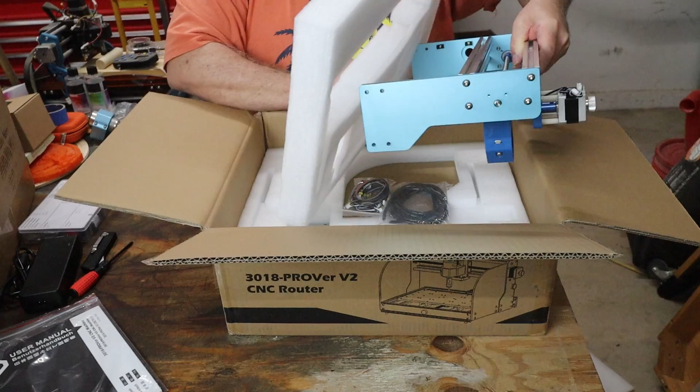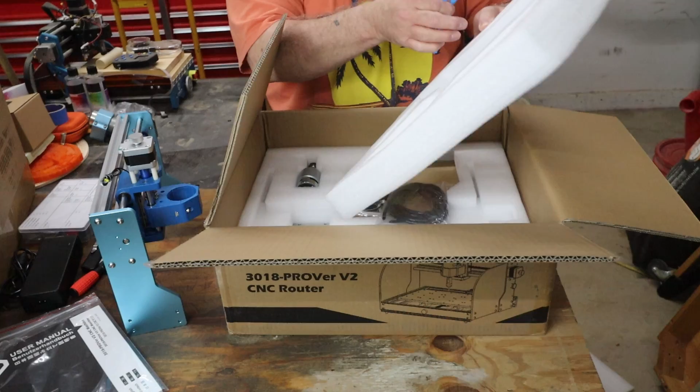Gantry looks nice. Another piece in here, let me get it out. Oh, it looks like plastic trim, I guess, to cover up wires that run along the extrusion.

Air tubing, looks like air tubing. Oh no, that's that plastic - when you have wires, that plastic stuff you wrap around the wires, keep it all together, can't think what it's called. Some more connectors.

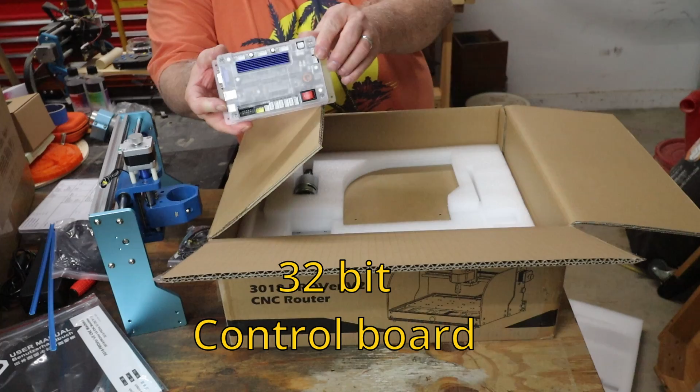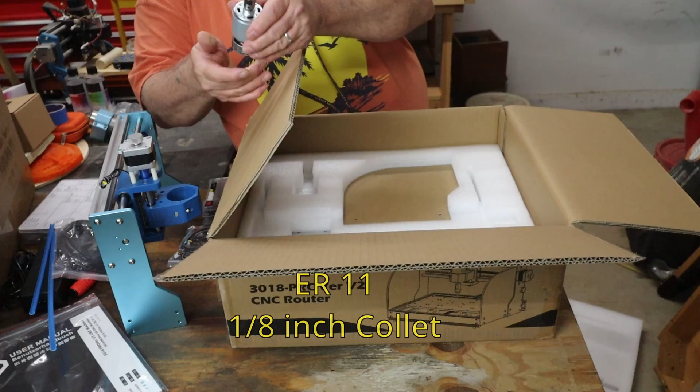Two pieces of acrylic for the sides. It says 3018-PROVer on it. We'll have to peel off the protective covering there.

And always look at your foam on both sides. You never know, you might miss something. Everybody's done it one time or another.

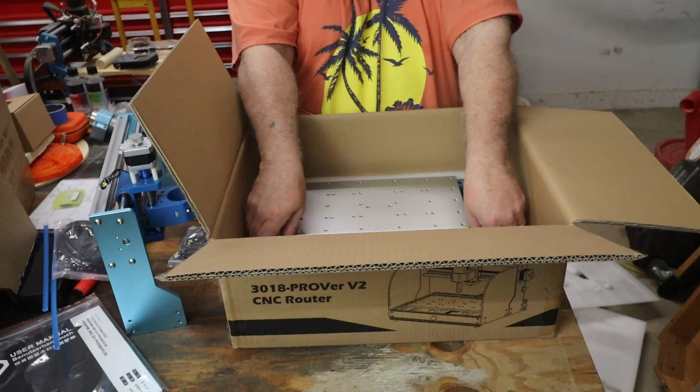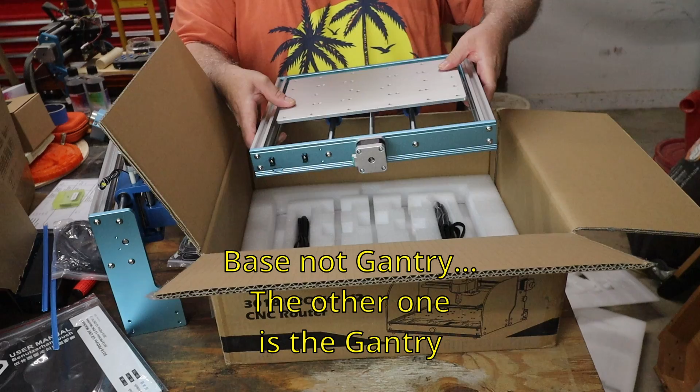Small set of bits. And here's the bottom of the machine, the base. We got the other half of the power cable there. USB, goes to your PC. Another power connector.

And it looks like that's everything in the box. So, take it.

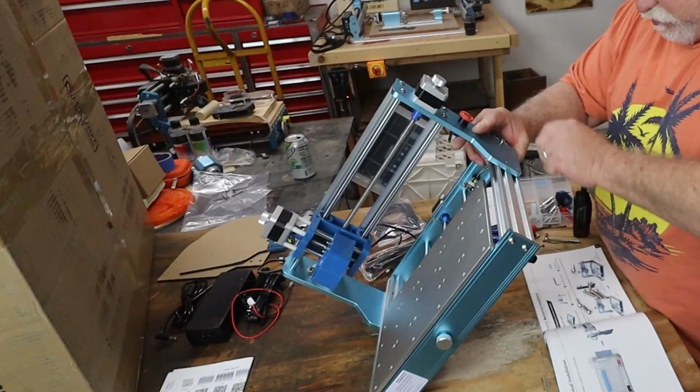Alrighty, I've got it all put together, so let's take a look and see what we got. The limit switches were not pre-installed, and all the wires were not covered in their sheathing, so I had to do that on some of it.

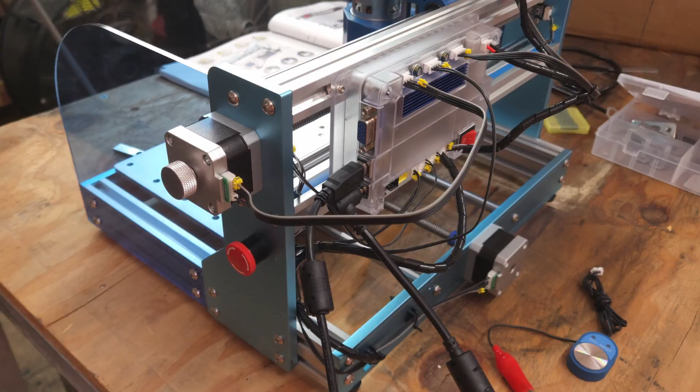This particular type of 3018 does not have an offline controller, so you need to be plugged into your PC. Kind of take a peek at what we got here. And then I got hold downs right here, metal hold downs.

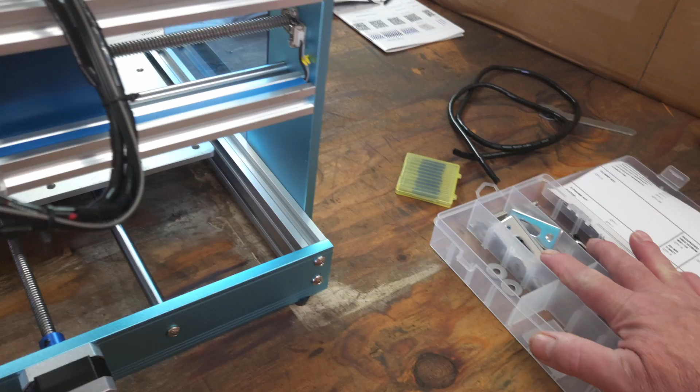I usually do blue tape and super glue. Usually works best for me. Got some sample bits here.

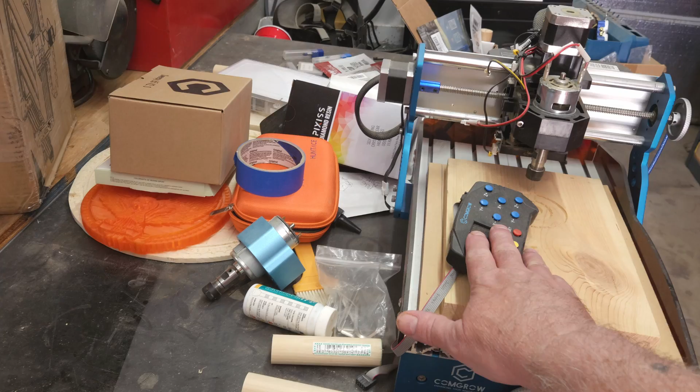Now, offline controller, you can buy them depending on which model you buy. Kind of like this Comgrow here had an offline controller, which I never used. I always tethered to my PC. But we can take a look at what we got.

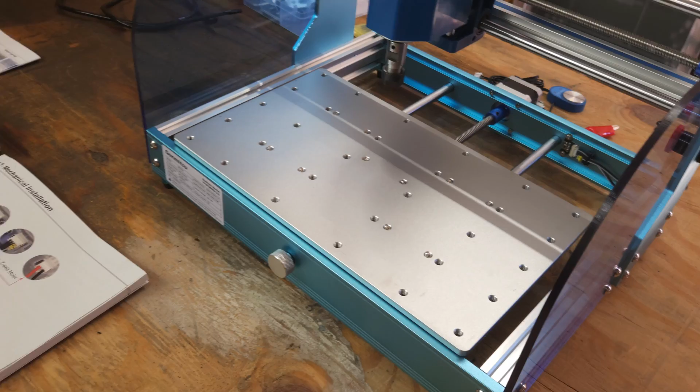And this will be the first 3018 that I've had that the bed moves back and forth, rather than a gantry moving - the gantry is fixed on this one. Goes left to right, and the bed comes forward and back. So that'll be pretty cool to try out.

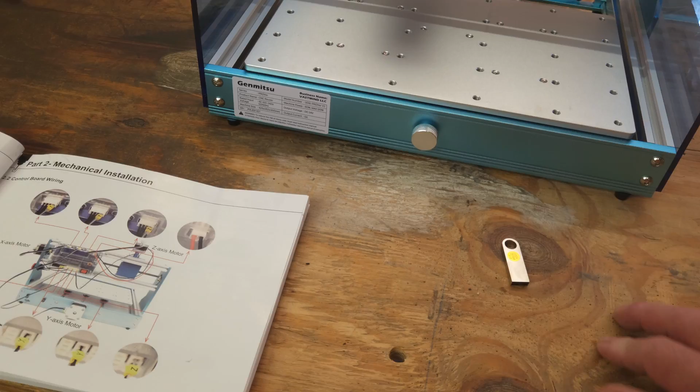So now you need to take the USB stick right here, jump over to your computer. If you've never had a CNC or laser installed before, you'll need to install the serial driver, the CH340, on your computer, and then we'll be good to go from there.

And then we'll load up Candle, we'll do a test file, and then I'll go into Carveco Maker that this came with for a 3-month free trial, and I'll create something and go from there. But yeah, it looks pretty cool.

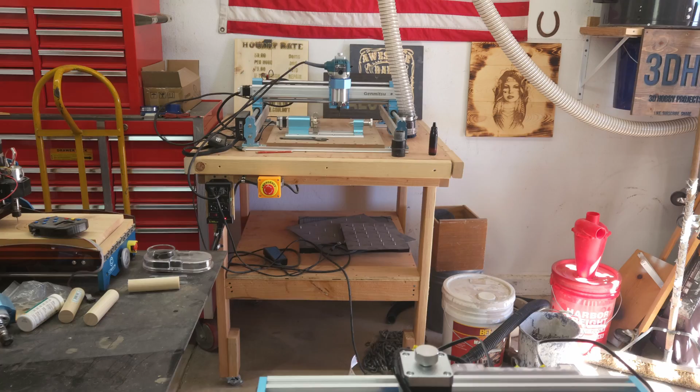Nice little machine. And then I have my other Genmitsu 4040 Pro back there. And once I get done reviewing this, doing a video or two on it, then I will jump over here to the Genmitsu Prover XL4030 V2. And I'll be having videos out on that soon.

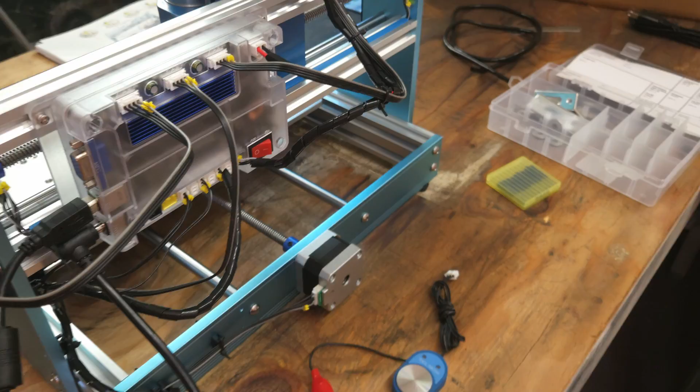But like I say, it's very small, very portable. If you're just getting into the CNC world, you're not sure whether you're going to like it or not, you might want to try this out and see what you think and do some very small projects, and go from there. So let's jump into Windows, get everything set up, and we'll get going, moving forward.

All the NEMA motors here have cranks on them so you can manually adjust things, to fine tune it and get it just right. It's a very nice feature. We've got up and down, left and right, and for the bed you can simply crank it that way to fine tune it and adjust it where you want it. That's a nice feature, having those knobs on there.

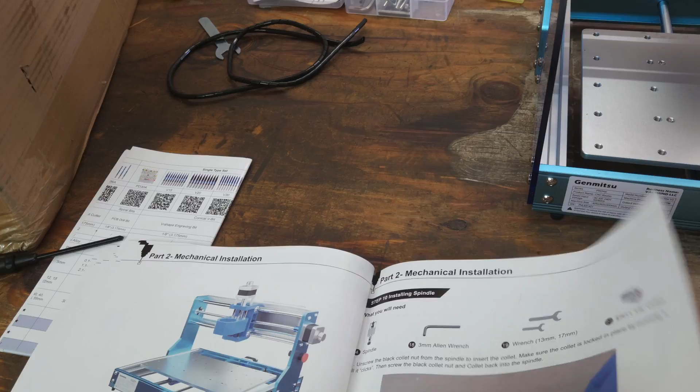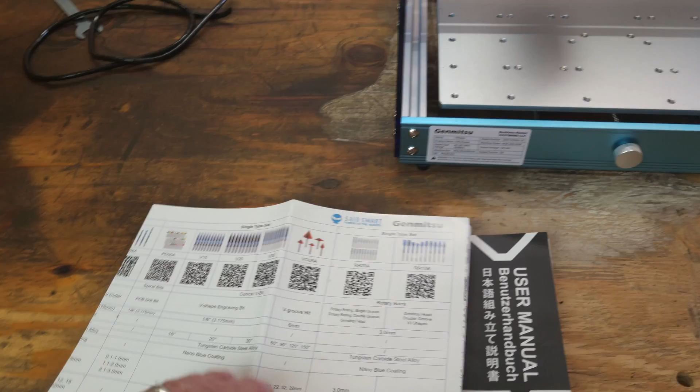So that's very cool. And then we've got a very colorful book here for when you go to install everything, and it explains everything in detail. We also have a 2-sided chart for different bits, speeds, and feeds from Genmitsu. I'll probably hang that up, possibly, I don't know.

Okay, that's home, 0, 0. Fire up the spindle. And the spindle's working fine. So now we're ready to jump in and let's engrave something.

Okay, a couple things I wanted to show you real quick on the USB stick that comes with the machine. It will have a driver right here. You click on driver, it opens it up, and it explains how to install the CH340 driver in your computer. If you've already got a CNC or laser, this will already be installed. But the PDF shows you very quickly what to do, how to install it, and it's very simple to understand. Closing this screen to go back to where we were at.

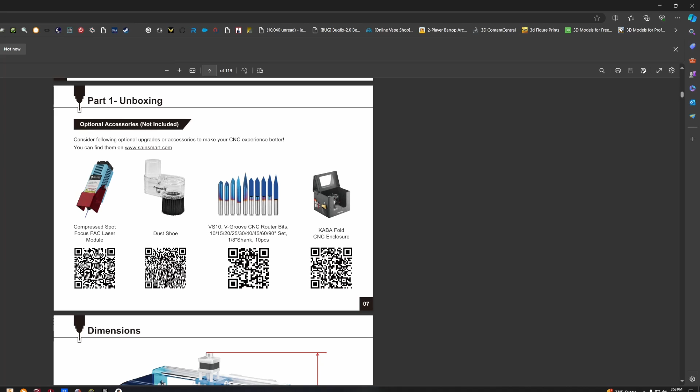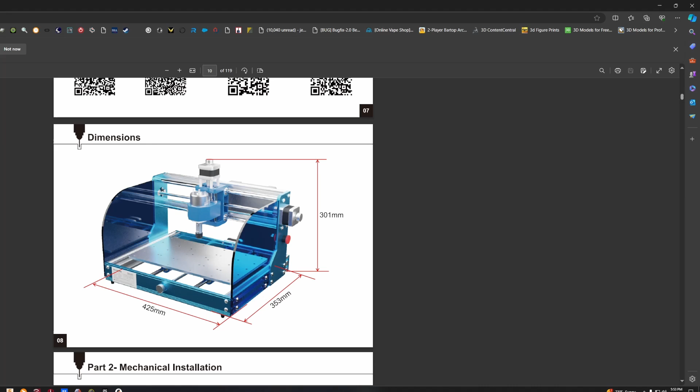And you can also get a laser. If you choose to run a laser on this, you can. There are other options - if you want an offline controller, you can do that. Here's all the dimensions: top to bottom is 301 millimeters tall, 353 millimeters deep, and 425 millimeters wide.

And it just goes through and explains everything that I did, which I time-lapsed and sped up real fast so you wouldn't be bored forever. And yes, it does have an emergency stop button right there on the right side. I forgot to mention it in the video, but on the right side it does have an emergency stop button.

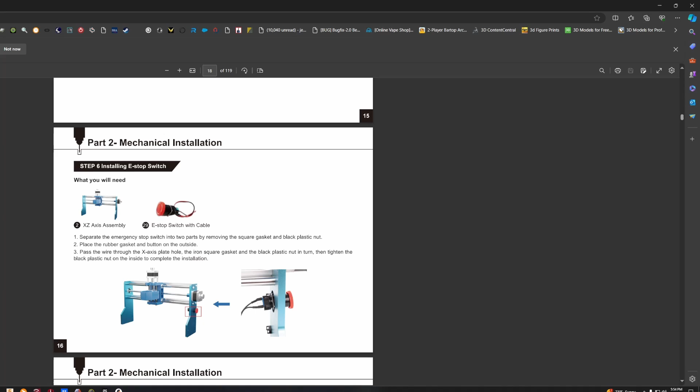When you install that, if you turn on the machine and nothing is working, turn that and check it, make sure it's popped out. Because quite often somebody might bump it, have it pushed in, and they're wondering why won't my machine turn on. But yeah, that's usually the cause right there.

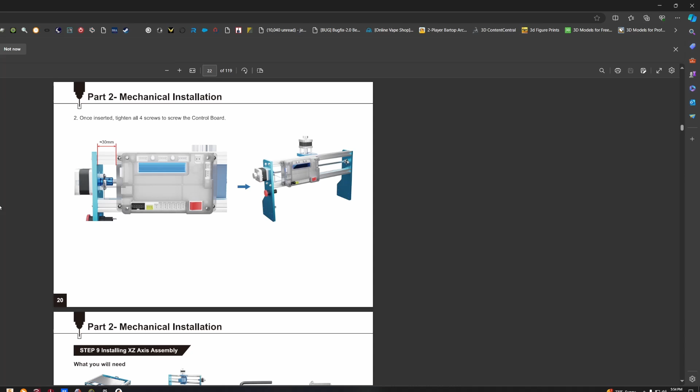But then on the controller, you see in the bottom right there, we've got a big red button. That's how you turn it on and turn the machine off. And I've got it tethered on like a 20-foot USB line going over to my computer.

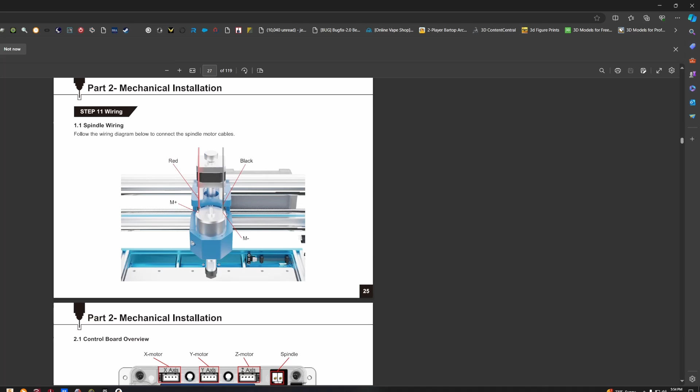I'll just scroll through these. Anything here you might want to look at more, just pause the video to check it out. But yeah.

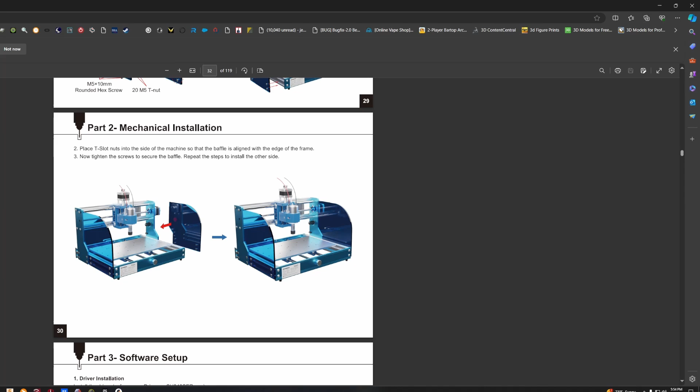And the version that I had to install, like I said, the limit switches and the wiring didn't have the sheathing over top of it, but it does come with plastic sheathing. It's like sliced - you kind of wrap it around it, like an orange peel.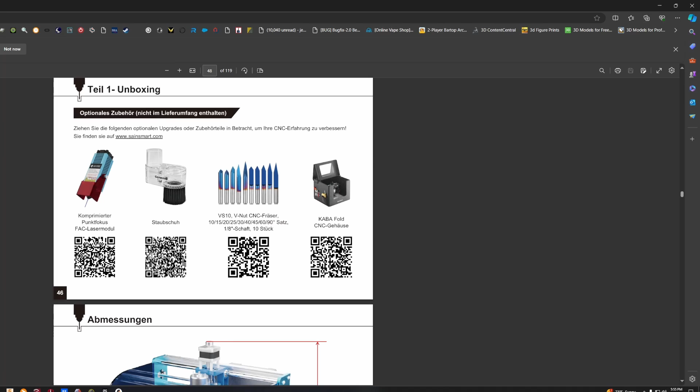Let's jump over to their website. Here's SainSmart's website, sainsmart.com. They have an option here for the machine only, which I have, or the machine with the offline controller, which is a little more money. Let's scroll down and take a peek at some of these pictures.

I do not have the laser for this, but I do have other lasers in the house, just not set up to work on my CNC. Here's some other content creators that have done different videos on it, and they're on their website if you want to go check them out. Here's a comparison between different machines that they have.

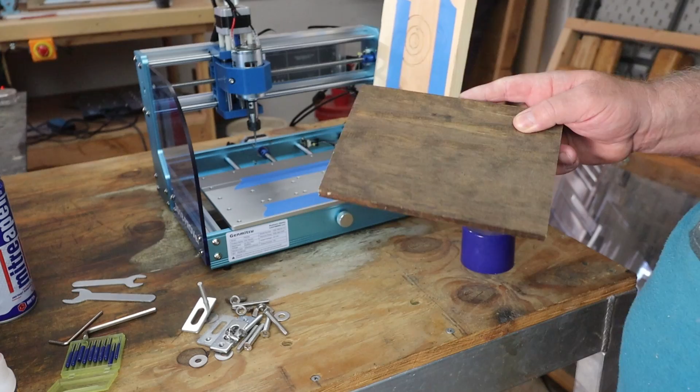So we're going to grab some files, get loaded up, and we're going to get going. Okay, I was just doing some testing, and I was using some real thin material I had stained. I blue taped it, had it stuck down, I was ready to go. Put the bit in. I wound up dropping the spindle a little bit so I wouldn't cover up the vents, and I dropped the bit down and I still couldn't reach my material.

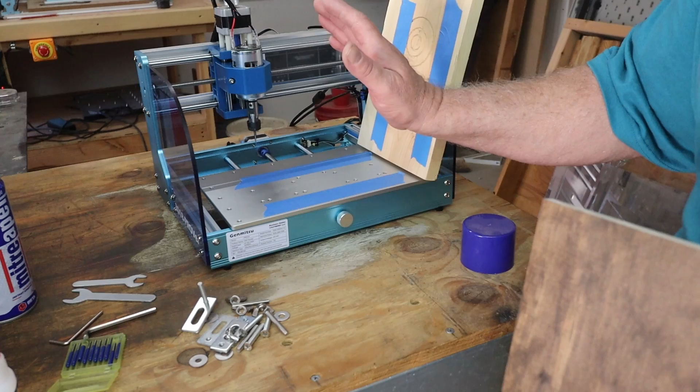So I need to put either a little spoil board on here so that I can properly cut it, or just work with some thicker material. I'm going to go with thicker material for now, but I'll probably wind up putting a spoil board on it. Besides, when you cut through your material just to the hair, if you should ever do that, you don't want to break your bit when you hit the metal. So I have to put a little spoil board on it, or something like a 1/4 inch thick would be perfectly fine, and have that blue tape down.

Basically, use the blue tape and glue method, which I'm going to show you right now. So what I do, that 2P10 is what I'm currently using. I'll put a little bit of super glue on one side.

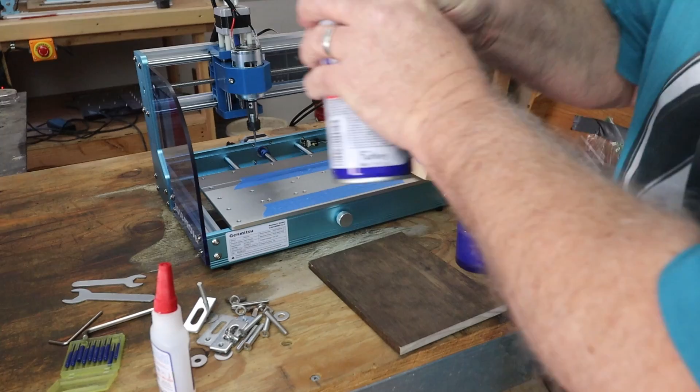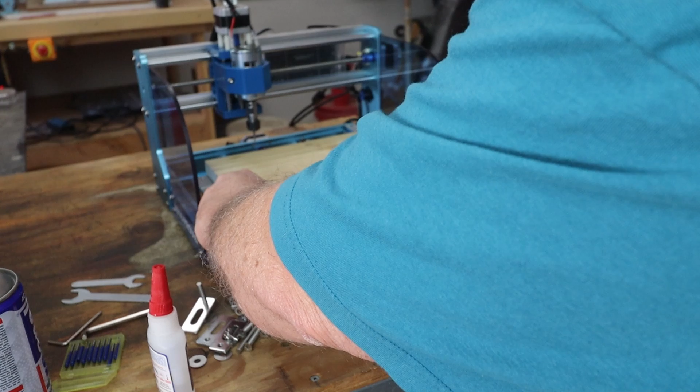Now I'll take my spray activator, spray the other side. Once you line it up and stick it, in like 2 seconds it's done. It's down to stay, down for the count. Line it up on that front edge, give it a nice press. Takes like 2 to 3 seconds, and boom, you're good to go.

When you're done with your work, take a spatula, simply pop it loose, pull off the blue tape, and you're ready for the next job. But it definitely needs a spoil board on it, so I'd rather bring this spindle back up a hair where it's got the flange on the inside, have it flush with the top rather than being sunk a little bit lower like that.

So now we're ready to get started on the next project. Let me get my XYZ home and we'll get going. I'm not going to use a probe, I'm going to use a piece of paper. I'll bring the bit down, get it to barely drag. That's the fastest and easiest way I like to do it. We'll get going in just a second.

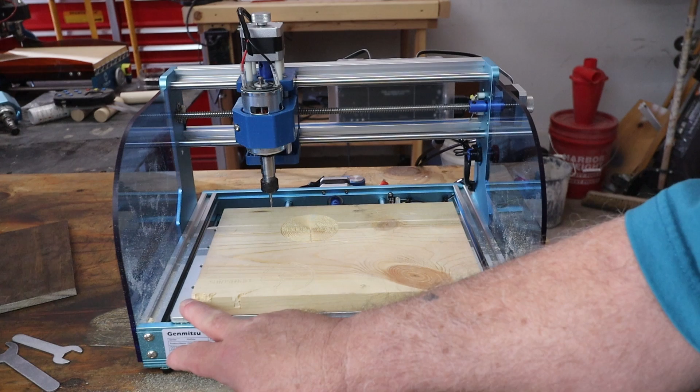Okay, those all got done. I had some chip out right here and right here. I forgot to zero out my X, Y, and Z in Candle before I started, therefore it dug in.

Then I went up here and did the spiral. It should have been 1 pass and stop, but for some unknown reason I let it run 4 passes. It still hadn't finished, so I had to abort the job. When they sliced this with SainSmart, I don't know how many passes they had it set up for, but it kept rerunning the job.

That's why it's starting to look kind of tore up and dug in. Then I took my little brush and brushed it off. Then I got the wheel, it was done in 1 pass, and that came out perfectly fine. But like I say, you need a little spoil board on top of this.

Unless you're just going to be doing engraving on something fairly tall, you won't have to drop your spindle down so much and leave the bit lower than normal. So this material is taller. I need to pop this spindle back up to where it's at, but you never ever want to cover up the vents. It needs to get air in there to circulate to keep the spindle cool.

So, with that being said, yeah, I've done a pretty good job. Let me take the camera off of the tripod here, kind of get you a close-up.

And see, you got the little bitty SainSmart there. The wheel came out good. And then, you know, there in the back, it just kept going around and around and around. I kind of chewed it up because it ran too many passes. It should have just been 1 pass. But it's a cool little machine, working good.

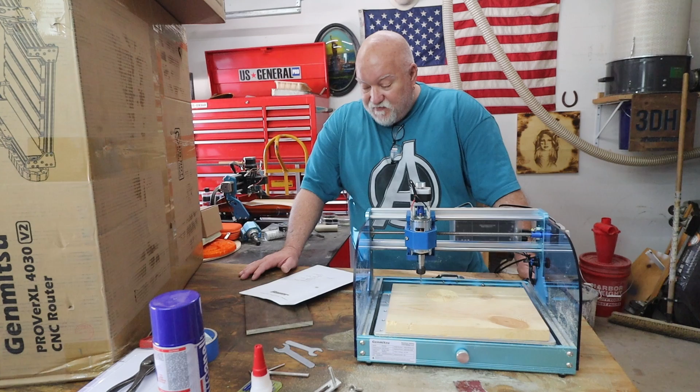Well, I guess that's going to wrap up this video. As far as for different software that you can use to design programs or get free files or anything you want to use.

There's Carveco Maker. I believe this comes with a 3-month free subscription to Carveco Maker. It's normally, I think, like $15 a month. There's Easel, I used to use Easel and pay monthly. I believe it's like $25 a month if you want to pay monthly. Easel is very easy to use for new users.

We got Carbide 3D, Vectric software, Fusion 360, and at some point in the future, Lightburn software that I use for my laser will be coming out with software to control a CNC and design programs. So there's a lot of options out there.

Yeah, cool little machine. Like I say, I need a little spoil board put on it. That way it'll give it a little more height, unless you're engraving tall wood like I just kind of showed you with the test files here. It's a cool little machine.

You can order it with an offline controller if you should choose to do so. That way you don't have to have it tethered to your PC. And yeah, it's a nice little machine.

Next, coming back here in the next couple videos will be the Genmitsu PROVerXL 4030 V2 CNC router that I'll be working on next, and some more videos that are upcoming. I'll probably order another Makita router and put on them, because I have the SainSmart 4040 Pro behind me with a Makita router on it, and I hate to have to strip it off that machine to put it on the next one that I'm testing and jump it around. So there's a good chance I'll just buy another Makita router for it. They're pretty reasonable over on Amazon.